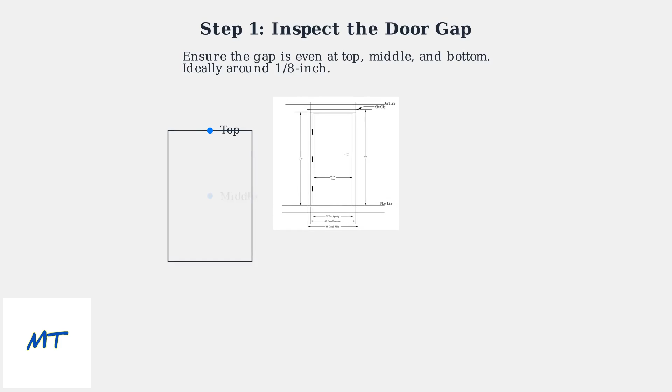Begin by inspecting the door gap, ensuring it's even at the top, middle, and bottom. The ideal gap is around 1/8 inch for proper latch function.

Next, close the door and use a pencil to mark where the latch bolt contacts the strike plate. This mark reveals the direction and extent of any misalignment.

To adjust the strike plate, first loosen the screws that secure it to the door frame. Next, reposition the plate slightly up, down, in, or out to align it with the pencil mark indicating where the latch bolt contacts the frame.

Tighten the screws to secure the adjusted strike plate in its new position. Finally, test the door by closing and locking it to ensure the latch engages smoothly without sticking.

Door sagging can cause misalignment of the latch. Shimming the hinges corrects this by lifting or leveling the door. Shims are thin pieces of wood or cardboard inserted behind the hinges on the door frame or door itself.

Start with the bottom hinge, as it bears the most weight and needs the most adjustment. Insert the shim behind the hinge to lift the door slightly. This reduces the gap at the bottom. This adjustment realigns the door and improves latch engagement, ensuring smooth operation.

For Schlage deadbolts, you can adjust the latch bolt itself to compensate for minor misalignments. Rotate the faceplate on the door edge or adjust internal screws to extend or retract the bolt slightly.

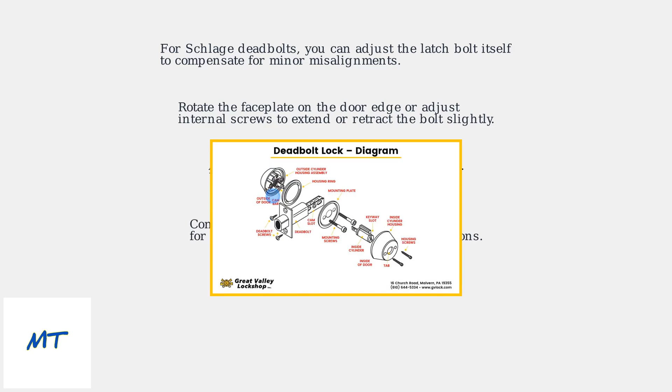Avoid forcing the door to prevent damage. Use a screwdriver for adjustments. Consult your Schlage installation manual for your specific model for detailed instructions.

Smart locks, such as the Schlage Encode Plus or Connect, may display error codes indicating misalignment through the Schlage Home app. Use the app's diagnostics to identify the specific issue, such as misalignment or connectivity problems.

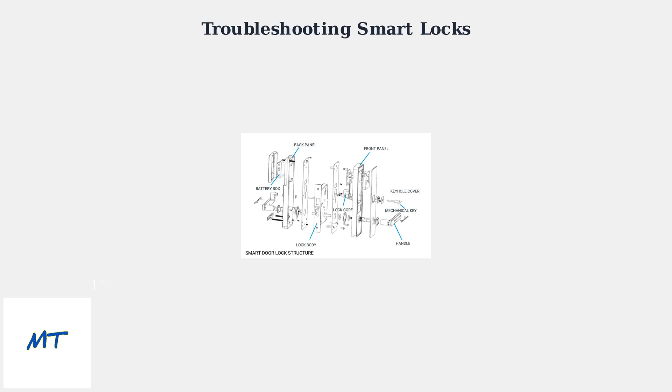Firmware bugs can also cause issues, so ensure your smart lock firmware is updated. If needed, combine digital troubleshooting with physical adjustments to the lock components.

Sticking latches can often be resolved with lubrication. Apply graphite powder to the latch bolt and strike plate. This dry lubricant prevents sticking without attracting dirt.

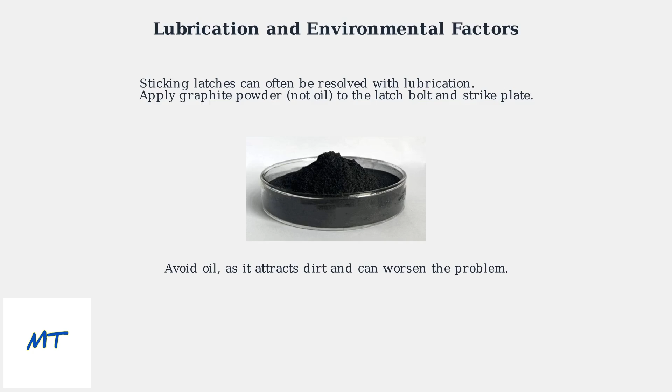Avoid oil as it attracts dirt and can worsen the problem. Oil-based lubricants can gum up the mechanism over time.

Temperature and humidity changes can cause wood swelling, exacerbating sticking. Regular lubrication and adjustments can mitigate these effects.

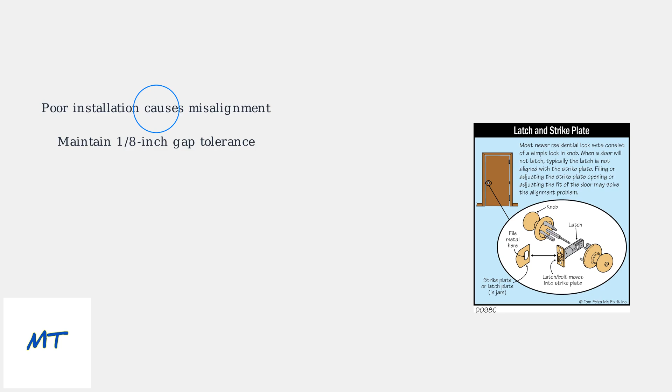Poor initial installation is the primary cause of most Schlage latch problems, leading to misalignment, sticking, and hard locking. Always ensure correct installation tolerances with an ideal 1/8 inch gap between the door and frame at the top, middle, and bottom. Regularly inspect and adjust the latch and strike plate to catch issues early.

Check for wear, alignment, and consistent gaps. Use measurements to verify proper positioning.

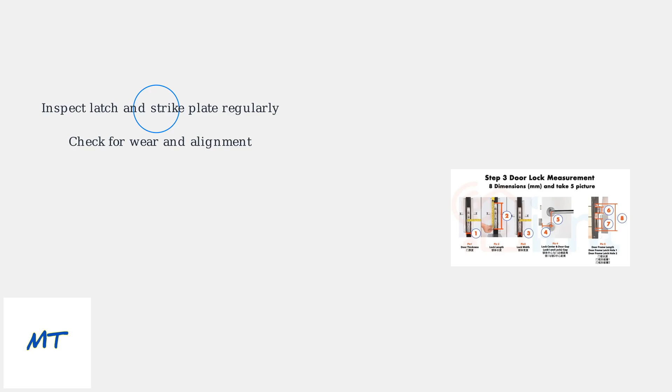For Schlage smart locks, monitor battery health through the app and ensure firmware is regularly updated for optimal performance and security.

By following these preventive maintenance steps, you can ensure smooth door operation, reduce wear on components, and prevent future latch problems.